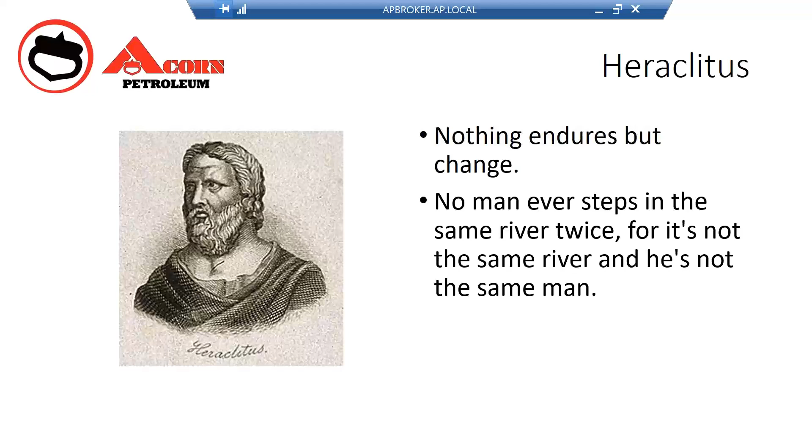So why oil sampling? Well, the technology has advanced to a point where program maintenance is just outdated. We'll talk about that in detail. In modern business, just to be competitive, all your resources have to be in play and utilized to the maximum capacity just to stay competitive.

Now, things are moving so fast, and getting equipment is even harder. So just to stay in business, companies have to move faster and employ more of their resources.

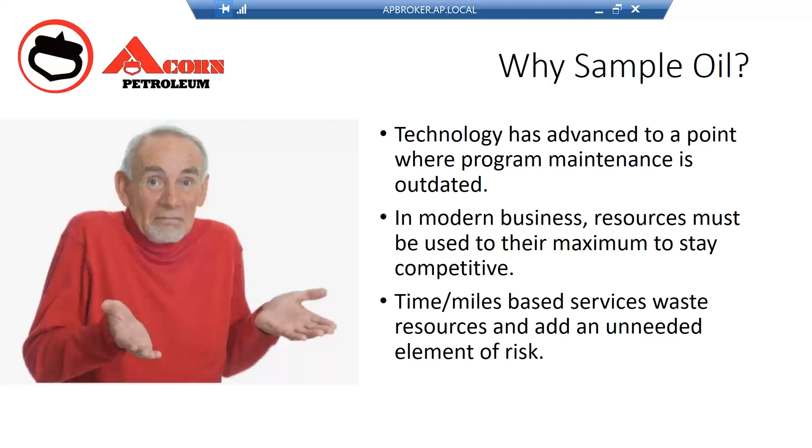The old time miles-based services waste resources, and they add an unneeded element of risk to your operation. Even the owner's manuals are telling us that things are getting better with the lubricants, but most manufacturers are calling for oil analysis, saying that this is the best way to manage things. Some manufacturers even have their own labs. It really is the best defense against a failure and to maintain your warranty.

Talk about my wife's very first new car, this is when we were first married, and she wanted a new car to move the kids around in. At the time we only had 2 kids, and she looked around and chose a 1984 Ford Escort. We bought it brand new off the showroom floor. It was her very first brand new car, and we still talk about that car. It's still to this day one of her favorite cars she ever had, and it was easy to park. Everything about it was easy for her, and she just liked it.

And we ended up putting almost 200,000 miles on that car. The point I'm bringing up is that it came with an owner's manual, just like every other car in the world. During that time you didn't have to look it up on the internet, it was actually given to you when you bought the car. And everything in the back was based on time and miles. All the maintenance schedules were based on time and miles. An interesting point is that it actually called out for the replacement of the timing belt.

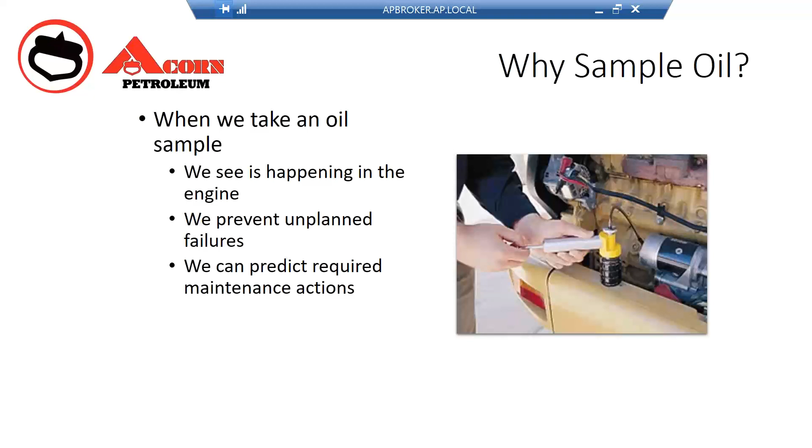We do the same thing with oil sampling. We can look at the oil sample, and if we've got some good background on that particular vehicle or piece of equipment, we can see what's happening inside it. We can see what's going on. We can actually probably narrow it down to which component is wearing in the equipment, and we can predict what maintenance is going to be required down the road and when.

In maintenance, and especially in warranty, we have what we call the bathtub curve. A lot of companies will give you extended warranties on certain pieces of equipment or cars or vehicles, but it's all based on what they have found is the relative failure rate within the bathtub curve. You can see there's three different curves here: one is the wear out curve, one is the infant mortality curve, and then you have the observed failure rate curve, which is what we actually see.

The very beginning, the first third of the curve, shows that break-in period that we all know. Then the middle area is basically the longest part of owning the vehicle or equipment - the constant failure rate. This is where it's consistent. Everything's consistent, and you don't have a lot of problems during that time.

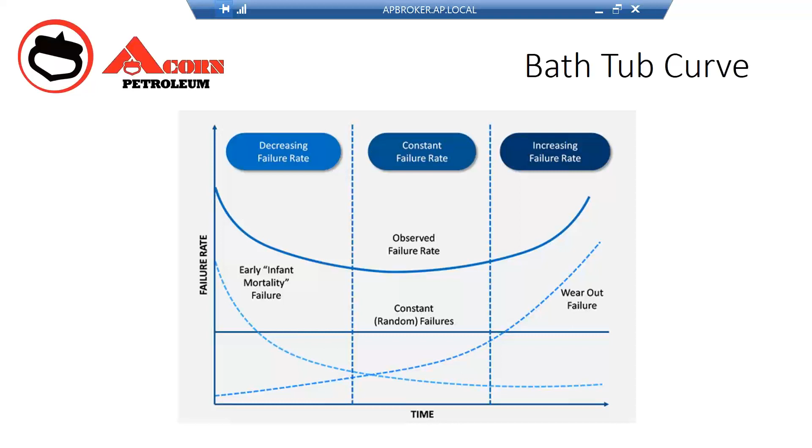Then as the vehicle or piece of equipment starts to get older, we start to see individual components wearing out at an accelerated rate. So we start seeing more and more failures, and then we start thinking, gosh, is it time to replace old Betsy, or whatever we have to do? You can see it more clearly in this curve, because this one is probably more representative and a lot easier to see.

You see the infant mortality part of the curve, which is that very beginning - it's where all the manufacturing defects, the loose screws, the badly manufactured parts rear their ugly head when everything is first being broken in. Then that middle section, things just run normal - that's the useful life of the equipment right there. And then things start to fall apart, it gets a little old, a little long in the tooth, and starts to fall apart.

What we have here is this little line, and this is where we want to stretch that out as long as we possibly can. We want to keep that going as far as we can. That's why we use good lubricants, that's why we use good maintenance processes and things along that line, so we can stretch that timeline and make it as long as humanly possible.

It's this area that we start to question whether or not we need to get rid of the piece of equipment, or tear it all apart and do a complete overhaul, or what do we need to do at that point in time. Predicting when this happens becomes something that oil sampling can start to help you out with tremendously.

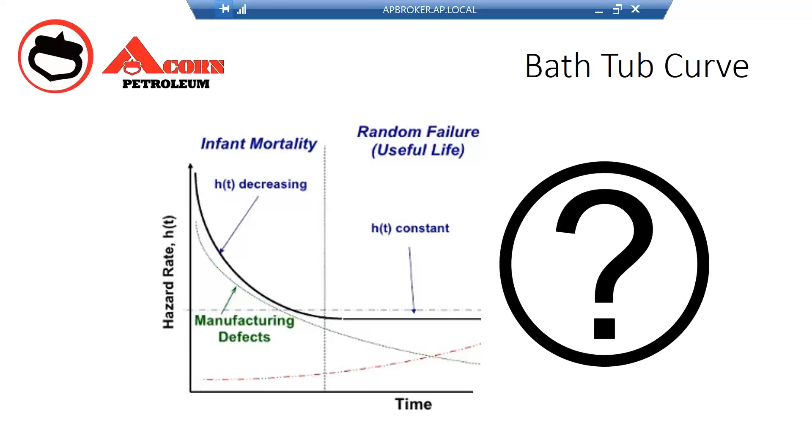Sometimes we have things that are just passed on from one person to the next, what we call tribal knowledge. And then all of a sudden that person is gone, and we have no idea what's going on with a piece of equipment, or what the scenario is. But if we have good documentation and a good predictive maintenance program, we don't have to worry about those things.

So what are the types of analysis? Well, there's used oil analysis, which is what I'm primarily talking about today. And with that, we're looking at the chemical makeup of the piece of equipment. We can tell you exactly what's going on and why it's happening. For the cost of the analysis, this is the best bang for your buck going into an analysis program.

And then there's infrared analysis. It requires some equipment, it requires some data keeping skills, things along that line that you'll have to do yourself. This is a very good interim step if you just want to check it. It basically tells you what the temperature or the picture of the equipment looks like as it's wearing out or getting older, and you can see as heat starts to build up. This becomes a reference point, and maybe you have some baseline photographs that you can run through and start seeing changes.

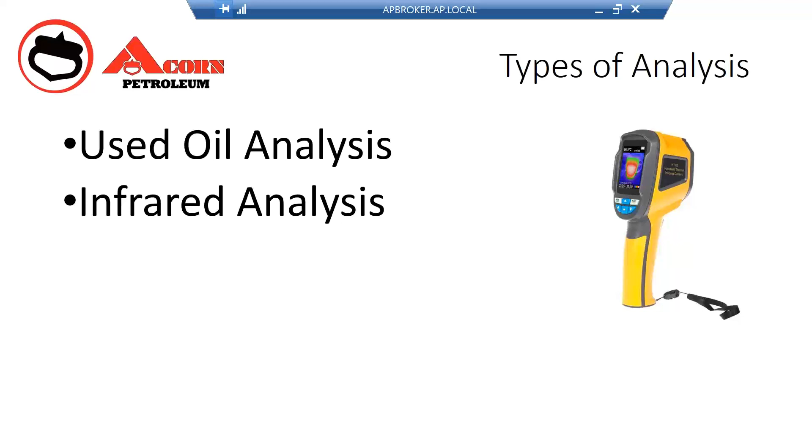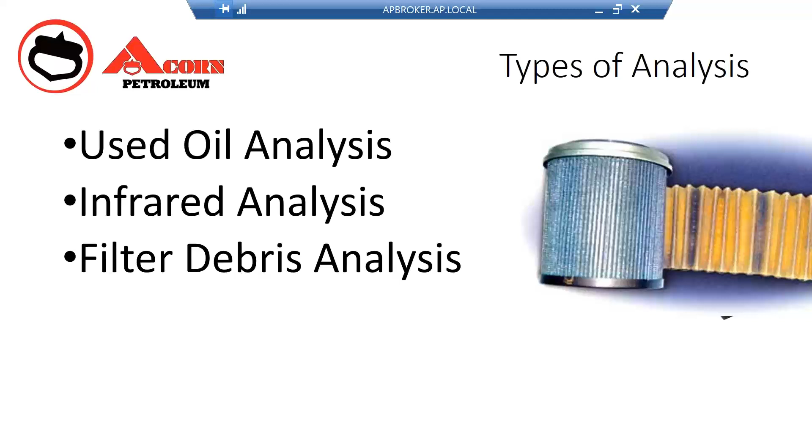Filter debris analysis, we use quite often. What filter debris analysis does for us is when we do have a problem and we start seeing some anomalies in the used oil analysis, or we have a catastrophic failure, we can actually send the filter off to the lab. They back flush it, find all the parts and pieces that are inside the filter, and run some analysis on it. Basically it can tell us exactly what component has failed, et cetera. It's expensive to do it that way, but it does give us a better picture of a historical scene inside the equipment itself.

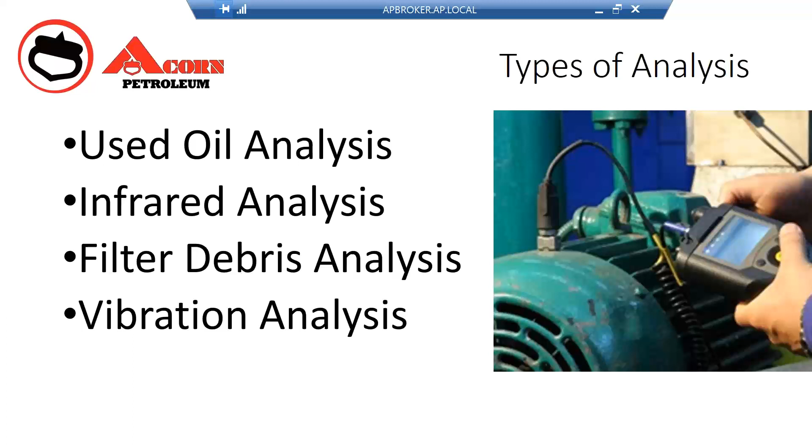And then we have vibration analysis. It basically tells you a bit about what, as the equipment ages and probably loosens up or starts to wear out, you pick up vibration or anomalies in the way that the equipment is running. It requires sensors, it requires some sophisticated equipment being installed. It's probably, of all the programs we're talking about, one of the more expensive ways of going in the short run. In the long run, it starts to become a little bit more cost effective. Again, used oil analysis is still a very, very cost effective way of doing business.

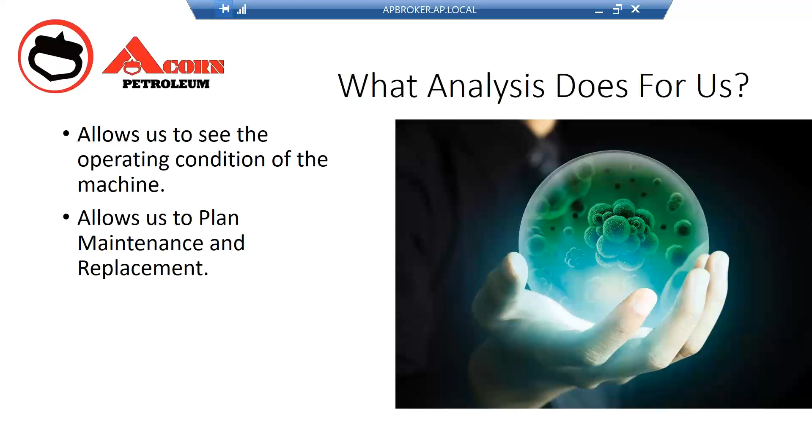So what does the analysis do for us? It allows us to see inside the machine, it gives us an X-ray to see what's going on inside. It allows us to plan maintenance and replacements on our terms. This way we can sit there and say, before we send unit number 7 out, it needs to go into the shop and have this replaced or that looked at, rather than have the failure happen 200 miles away, where it's going to be more costly to do business in many ways. So this allows us to plan maintenance, bring it back on our terms, and it helps reduce the overall costs of doing business, as well as eliminating surprises when things happen.

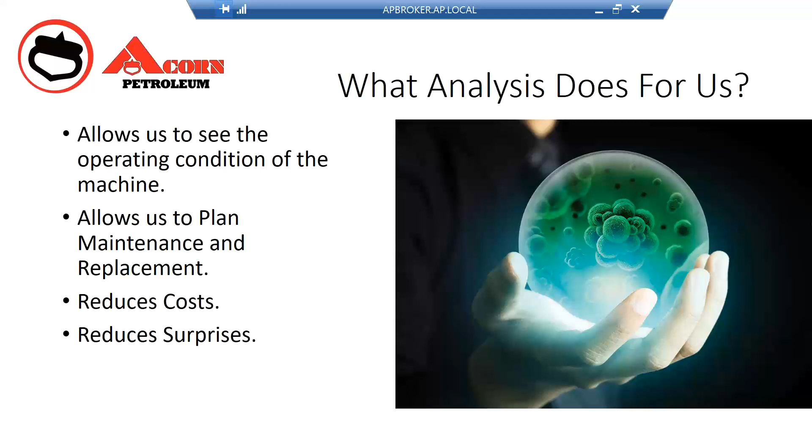So in a nutshell, this brings maintenance under your terms. It eliminates, or can eliminate, unplanned failures in the field. Nothing's perfect, but this is about as perfect as we can get. It reduces tows significantly and increases uptime significantly.

And as a byproduct of everything above, it increases revenue and profits.

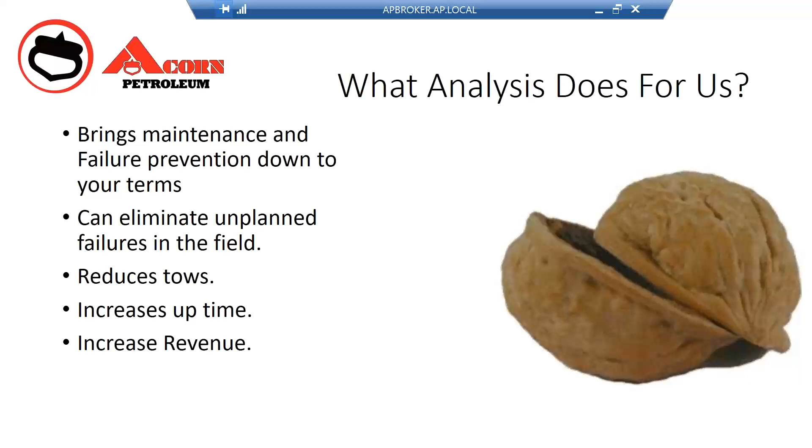So used oil analysis gives us a bigger bang for our buck. It stretches those dollars, gives us eyes inside the machine, and helps us see what component is failing. And then we can actually pinpoint with precision what component is failing, and maybe even why it's failing. That's a pretty important aspect of what we're doing.

Because if you know that you've got to do a bottom end, it's easier to start there than somewhere else. It just eliminates all the other possibilities, and you can pinpoint where you have to go. Or if it's a situation where you need to eliminate something causing a failure, maybe you can eliminate it before it gets worse.

And using this, we can eliminate costly failures, and overall save on lubricants, making those lubricants last longer.

In many cases where I see customers, when I'm doing an oil analysis, when I start them out on oil analysis, I see customers throwing away perfectly good lubricant. Some of them say it's cheaper to do it that way, but it's irresponsible in many ways, because it's an environmental issue, number one. Number two, it's just throwing money down the toilet. You don't want to do that.

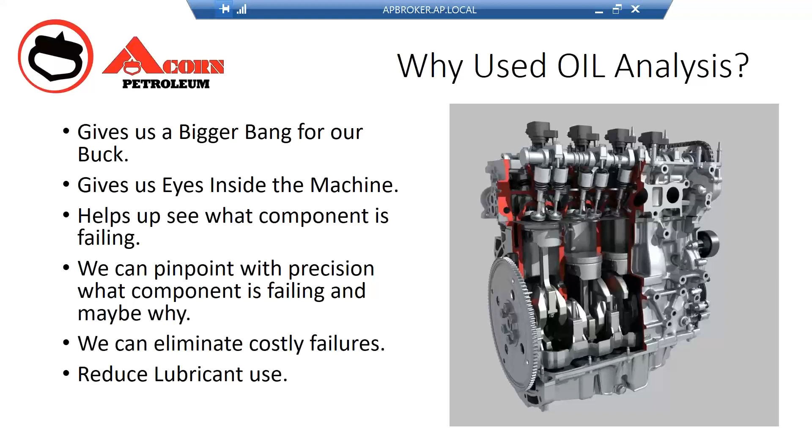It saves you money. And doing all these things helps us get to a predictive maintenance situation. And what is predictive maintenance? It's one of the three modes of maintenance.

There's run to failure, program maintenance, and predictive maintenance. Run to failure being the most costly, program maintenance being somewhere in between run to failure and predictive, and then you have predictive maintenance. Predictive maintenance being the single lowest cost overall, it will significantly reduce your costs.

And program maintenance is the standard time-based system that we've been using for decades. Change your oil every 7,000 miles, do the 250-hour service every 250 hours, touch the equipment so many times, do this every day, check this out every month or every so many hours - those kinds of things. That's what standard time-based or program maintenance is.

We're trying to move to predictive maintenance so that we don't have to worry about those things. In run to failure, there are aspects in every single company that has a run to failure feature in it.

I was talking to somebody earlier about the fact that even copiers or printers in a business basically run to failure. How often do you bring the guy in to do work on your copy machine? Probably when it's doing something wrong or it doesn't work anymore.

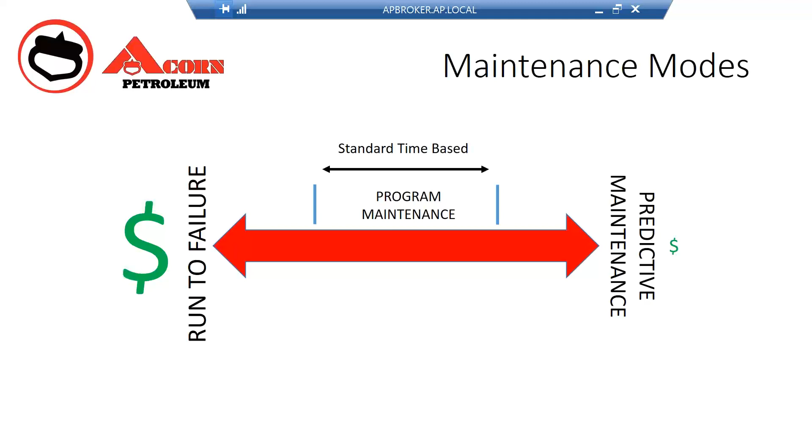We have customers that have gear sets in certain machines that, in their mind, they can buy these gear sets for XYZ dollars. It's cheaper to let them fail and replace them a couple times a month than to do any maintenance or oil sampling on them, because they can buy the gear sets so cheap. I'm telling them, well, with a little bit of oil analysis, maybe we can prevent them having to buy those really cheap ones. Maybe they could buy better ones and they'd last forever. Who knows? But there are certain things that we can look at and test.

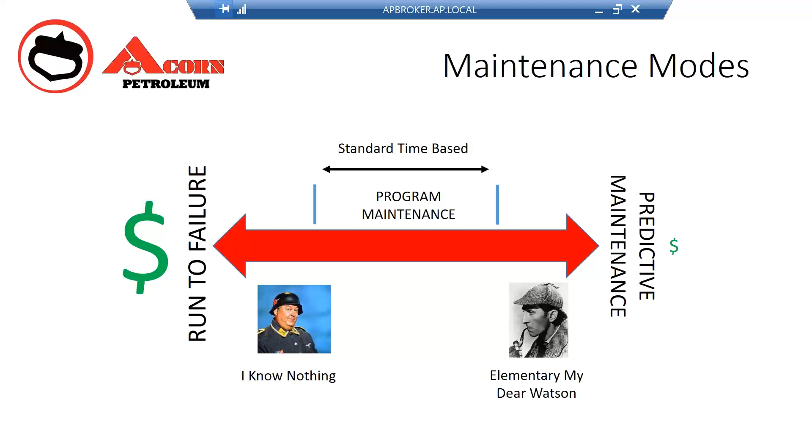But run to failure is the 'I know nothing' out of Sergeant Schultz in Hogan's Heroes - that's the mode you're running into. And predictive maintenance is the Sherlock Holmes, 'elementary, my dear Watson, I have the answer.' And somewhere in between knowing nothing and elementary, my dear Watson, is the program maintenance situation - it's a compromise between the two.

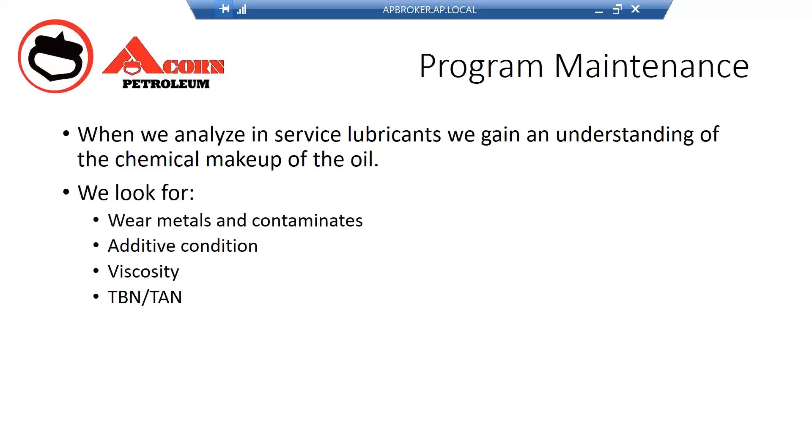When we start to look at an analysis of used oil, what we're looking for is wear metals and contaminants inside the oil itself, additive condition, the viscosity, which is the single most important aspect of any lubricant, and the acid number or the base number of the oil, to find out if it still has all the components in it that we need for it to be a good lubricant.

Using this information, we develop trends that help us determine the health of the equipment. That's the single most important part of our discussion today, because without doing an oil analysis, you don't know what's normal for unit number 7 or whatever it is that we're talking about here. Using oil analysis over a period of time, we understand what normal is for that equipment.

And that's huge. Understanding the trend is even more important. We do oil analysis on our fleet. I had the last vehicle that I had, we did a condemnation sample every time we pulled the oil out of it, and sent it into the lab.

The lab kept on coming back saying that they kind of flagged it a little bit and said, this is something of a concern, but it consistently came out with anywhere from 10 to 12 parts per million of iron in the oil sample. Well, 10 to 12 parts per million is hardly anything, but it's still something to be, in some cases, maybe it is a problem. But when the equipment is running perfectly, it's been doing that since day one. And over a period of 180,000 miles that we ran that truck, it stayed between 10 and 12 parts per million for the entire life of the vehicle.

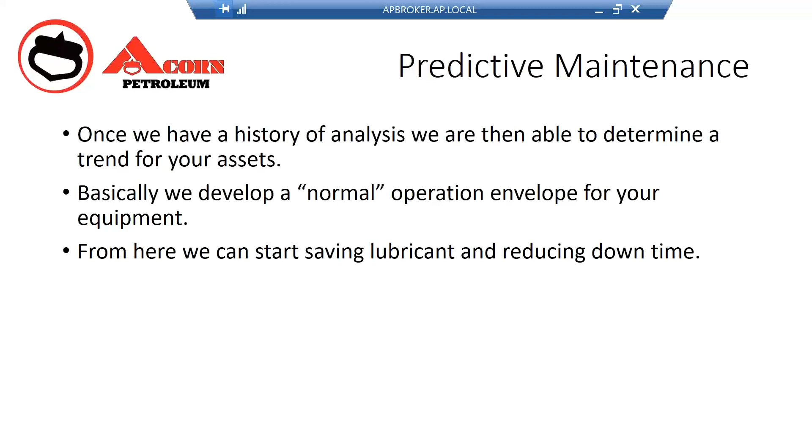Because once we have a history, we can determine the trend of our assets. We develop the normal for that piece of equipment. And then from there, we can start saving lubricants, saving downtime, reducing the time that it's in the shop, reducing our costs overall, doing all of those things.

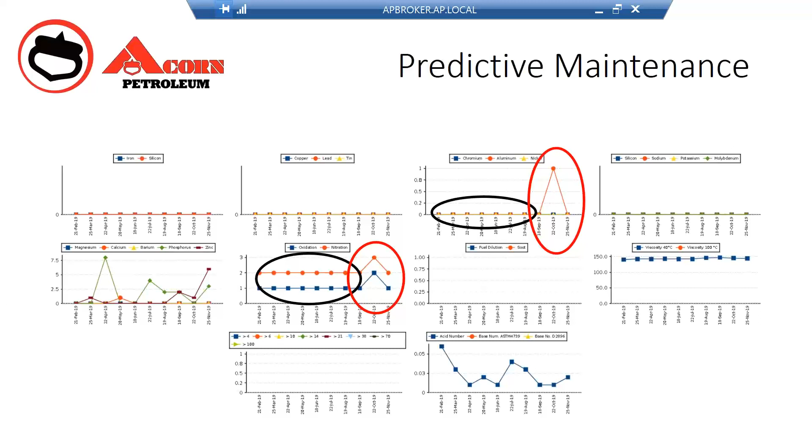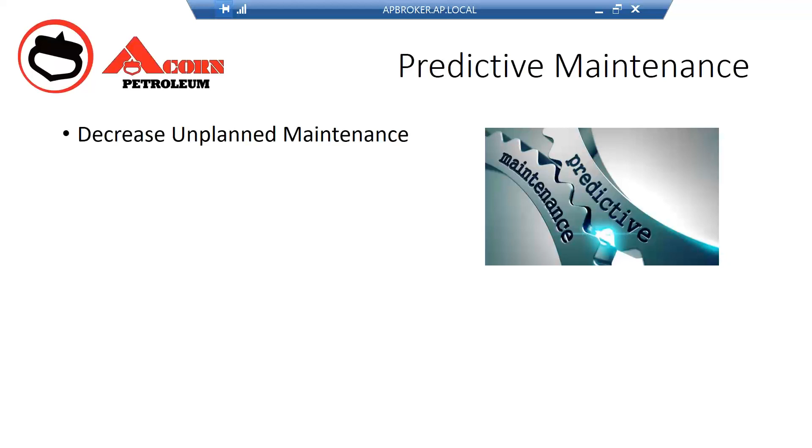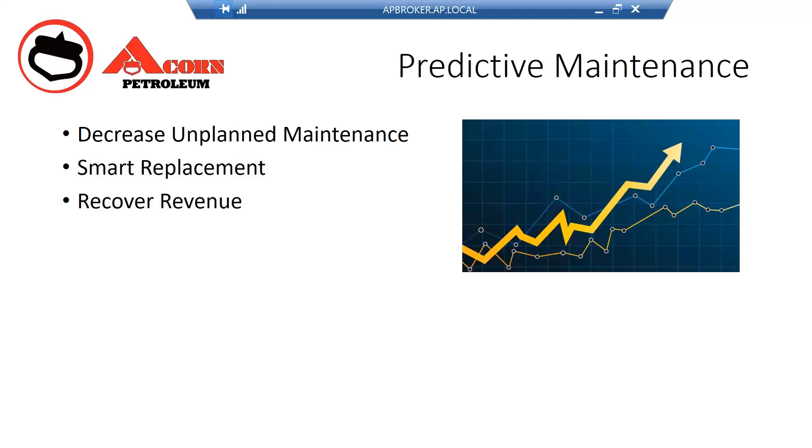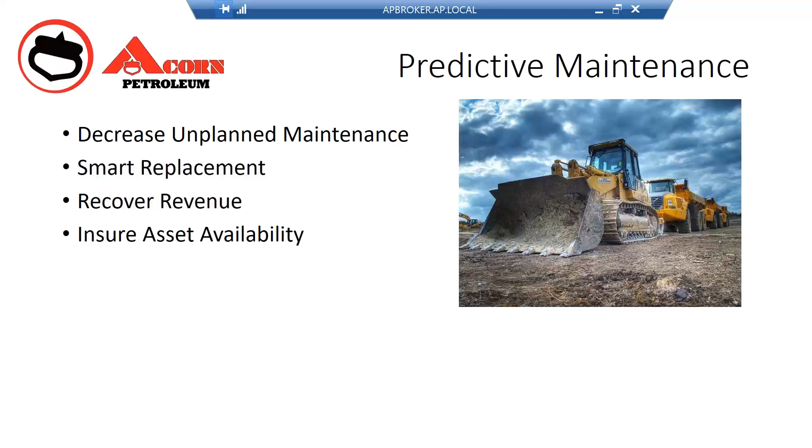So getting to predictive maintenance, we decrease unplanned maintenance—not totally, but as much as possible. And then we can start doing smart replacements as opposed to tearing apart and doing an entire rebuild on an engine when all it needs is something very minor done or changed to it, right? We start to recover revenue or retain revenue in many ways and turn that into profit. We can ensure asset availability, and that's important. We know what equipment is available to us and how reliable it will be.

The people are happy. We start seeing smiling faces in the company. They don't have a lot of things to worry about. They know that they're working. They know things are secure. People become a little bit happier in the workplace.

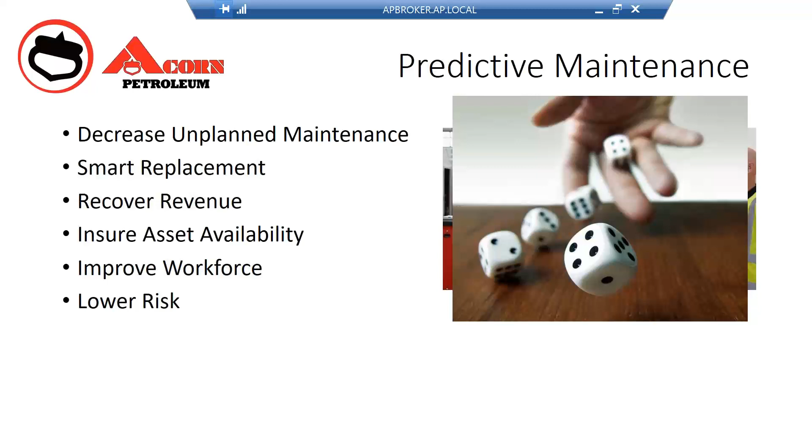There's no more rolling the dice with a piece of equipment. You lower the risk. This helps you save money, not worry about whether or not a piece of equipment is going to fail, et cetera. These are all things that we can lower, and the probability of certain things happening becomes almost nil.

We decrease service losses, tows, things along that line. Equipment stays in play longer. We don't have products going bad inside trucks, like in refrigerated trucks, because we know the equipment is going to get the product to its destination in a timely basis, since the equipment's going to run right.

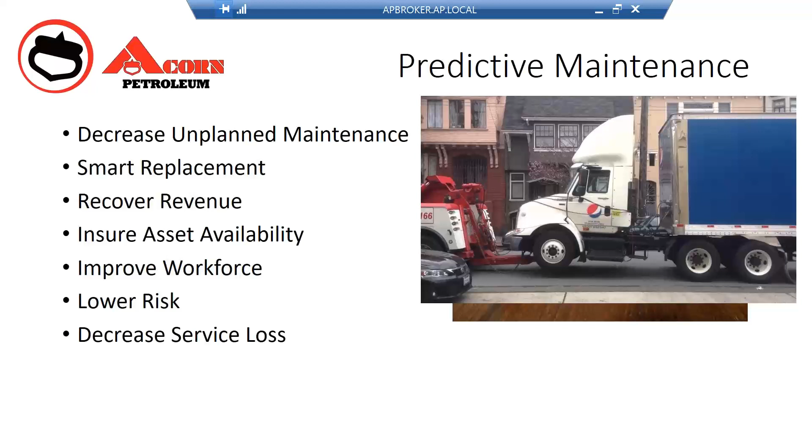And then it gets us into the Internet of Things. What we're really talking about here is the fact that your samples are going to come to you via an internet web portal that'll give you all the information you need to know. All your historical data will be in one place. You can get that on your phone, you can get it on your computer, and then all of a sudden...

You can take that report and forward it on to the maintenance department and say, hey Joe, you need to look at this so that the next time unit number 14 comes in, let's take a very close look at that so we can keep this machine running properly. In many of the programs out there, there's back and forth communication that can happen within that web portal, and it makes it so much easier to keep everything in one place.

So that, and you can get your reports on your phone, things along that line. If you're out in the field and all of a sudden you have a critical piece of equipment or a critical report that comes back, you can get that on your phone and deal with it right then and there, and take a piece of equipment out of service before it fails. All these things work together, and they're all equal in many, many ways. If we can start working through all of these things, then everybody's life improves significantly.

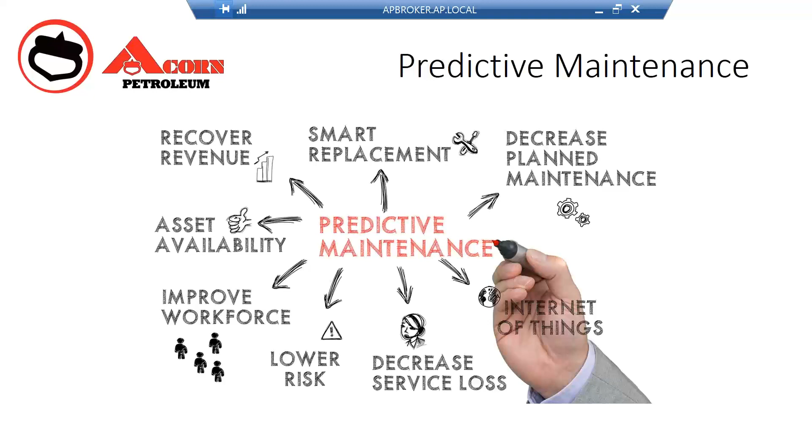So, all right Mike, what's this cost? How much? It depends. It's on so many different things.

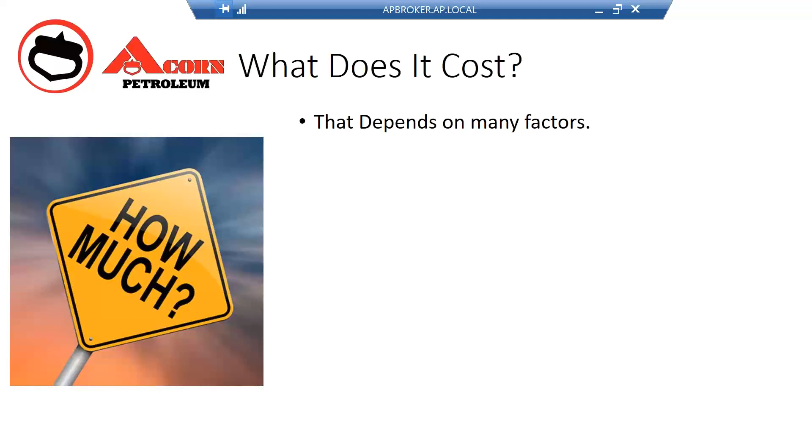What components are to be tested? Are we just going to do the engines? Or we know that 46% of all failures are coolant related, so we want to do coolant, or a combination thereof. Well, we have a lot of hydraulic failures, so we would like to start testing our hydraulics first and start eliminating those issues, or maybe do all three, or whatever it is that we're looking at.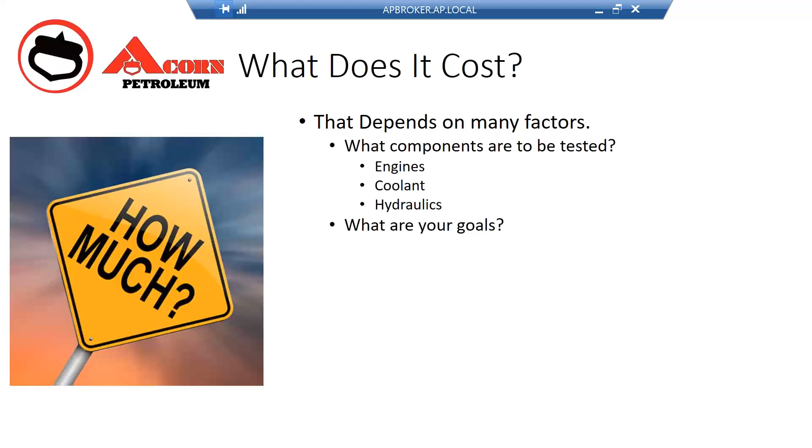These are all factors that affect the cost of what we're doing. But it really depends on what your goals are. Are your goals to solve some known problems that are in the field, or do you want to just knock it out of the park and do a lot of different things to maximize your savings overall? How far do you want to go to achieve the massive savings that we're going to be talking about?

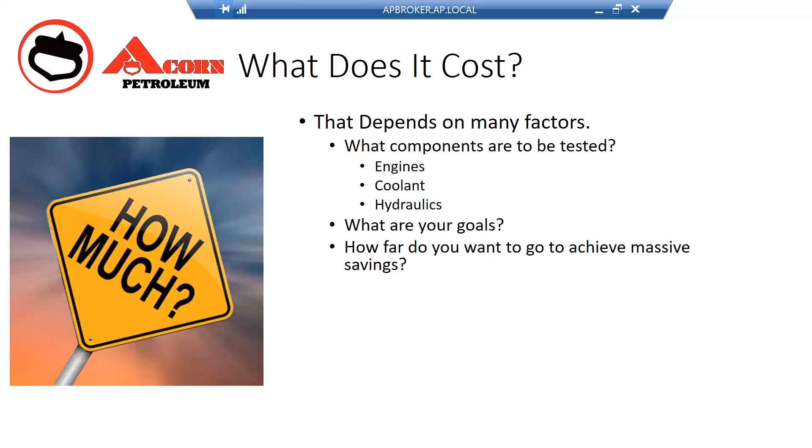And that's what's important. If we're looking at just doing engine oil testing, depending upon how many, at the worst case scenario, it probably costs you about $100 per year per unit to do oil sampling. But the ROI on that very same $100 can be greater than $1,000 to $2,000 or more in just lubricant and reduced service time alone per unit, just by implementing oil sampling on engines only.

Well, that doesn't sound like a lot of savings, but well, okay. Well, how many pieces of equipment do you have? How many trucks do you have? How many cars do you have? How many earth movers do you have? What is it that you have out there? You've got to multiply that by that, and that's what your savings are.

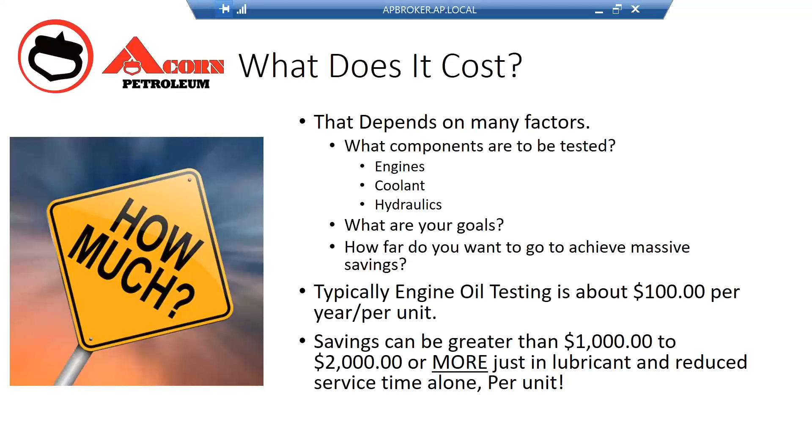We can talk about that in detail, and we can actually generate a report that you can look at, and it would make this decision a lot easier for you in the long run. So, all right, let's do this.

Well, it takes commitment to make this work. We have to have buy-in at all levels to make it successful. It just doesn't happen. It does take some buy-in, it takes a culture of commitment to make this work. And everybody has to be an owner in the program.

Vendor support is excruciatingly important. Your vendor has to believe in this process, believe in oil sampling, and believe in how it can save you money. And that's what we believe in. This is why we're doing this program to begin with. We believe in oil sampling, and we have the experience. We've got dozens of other companies that we've worked with and brought through this process, and they've come out the other end saving and being more competitive and more profitable. It's amazing, absolutely amazing.

Your vendor, this can't be his first rodeo. It can't be. This has got to be something he's done over and over again several times, because I've picked up other people's oil sampling programs and worked with the customer because the other vendor just came in, dropped some oil kits on his desk, and said have fun. We don't do that. We'll walk you through it. We'll make it work.